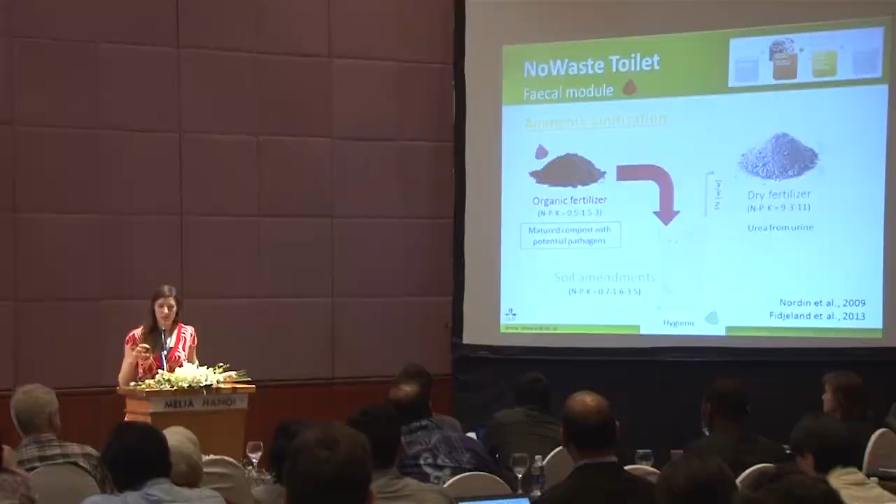So we would like to use ammonia sanitization as a post-treatment to ensure that all pathogens are eliminated. Ammonia sanitization is a technique that my colleague Annika Nordin has been explaining in the past, yesterday. By mixing in 5% weight for weight of our dry fertilizer, the remaining pathogens and enzymes still in the soil in the vermicomposted material hydrolyze the urea into ammonia, and then we're able to sanitize this to get a hygienic output.

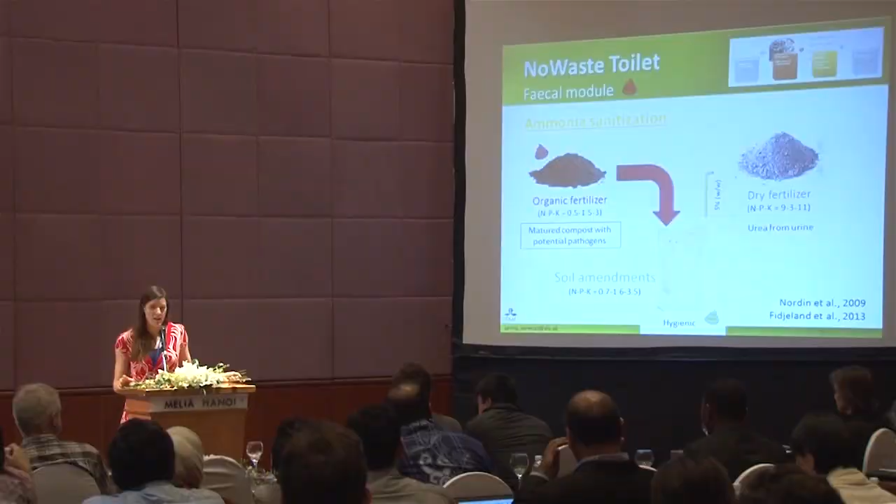Conceptually, this is how the toilet would come together. There's no need for big infrastructure or for deep holes. It can be a standalone unit itself or be implemented in existing households.

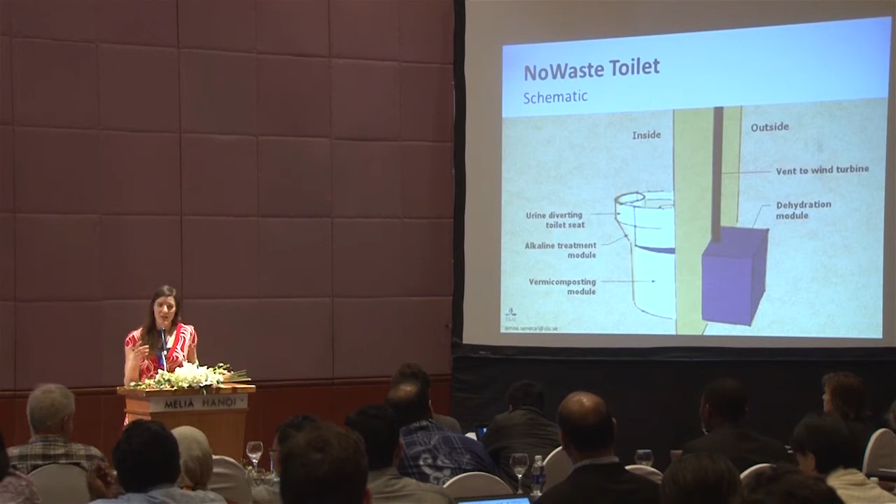The idea is that the urine diverting seat would collect the urine, and the urine would pass directly through the ion exchanger so that there's no time for the hydrolysis to happen, and then pass into the dehydration module. Again, the feces will fall down directly into the vermicomposting bin. This unit would be connected to a powerful fan so that we have enough evaporation rate happening, and be connected to the toilet so that there's a negative pressure and the smell is taken out.

For maintenance, the ion exchanger for a family of 5 would need to be regenerated once a week, and this is done with some hydroxide solutions such as sodium hydroxide. The dehydration module would need changing every 2 months, and the vermicomposting would need to be changed once a year. The estimated cost for the materials to maintain this toilet is about $30 per year.

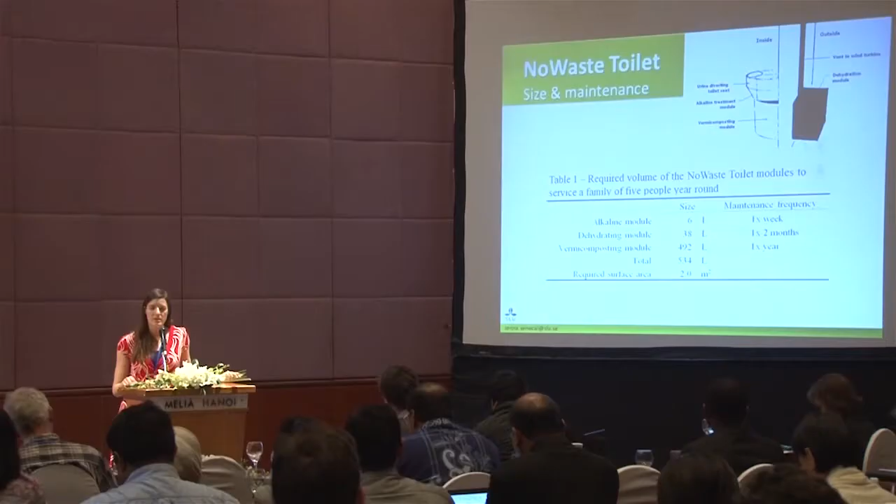Coming back to what this toilet is actually able to achieve, for the urine, we have about 1,800 kilograms coming in annually for a family of 5, and we're able to reduce this to 180 kilograms to produce a dry fertilizer while recuperating 85% of the nitrogen. For the feces, we have approximately 330 kilograms, which we're able to reduce to 35 kilograms, including the dry fertilizer being added to it for the ammonia sanitization.

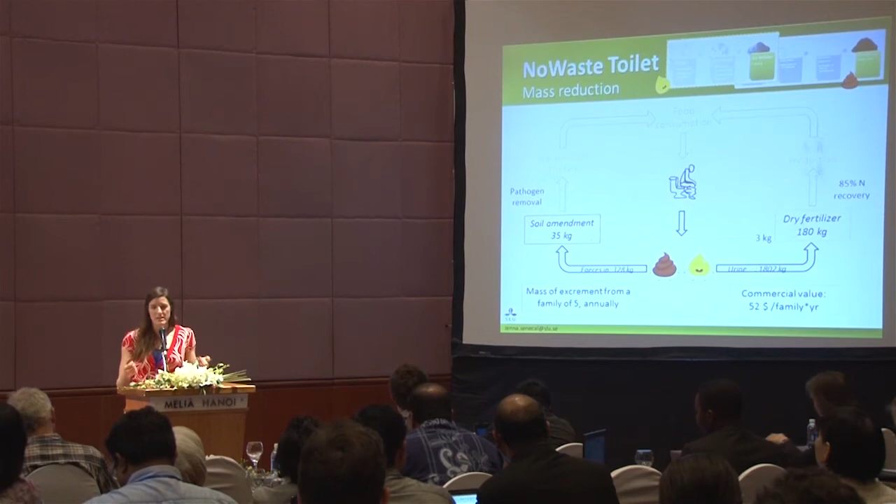So the exciting part is that we don't need a pump truck. We don't need big machinery to dig holes or to get in and empty it. The mass is reduced by 90% into manageable volumes that people can then handle. And a really important aspect is that the pathogens are minimized so that we don't have the spread of disease.

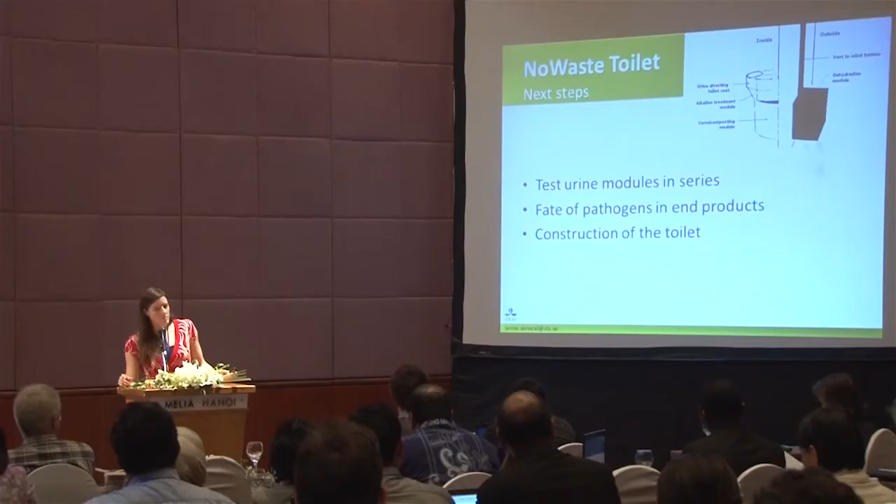Next, for my thesis work, I'll be testing the alkaline and dehydration module in series, and also be looking at the fate of pathogens in the end product. And this summer we will be installing 2 of these units in Sweden as a trial period. As we're still in the development phase of this, I'm very much looking forward to hearing your comments and thoughts, and thank you very much.

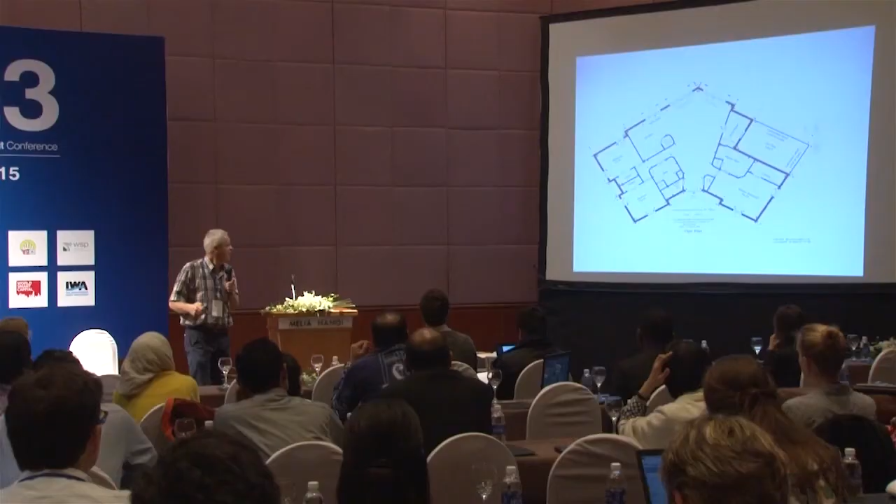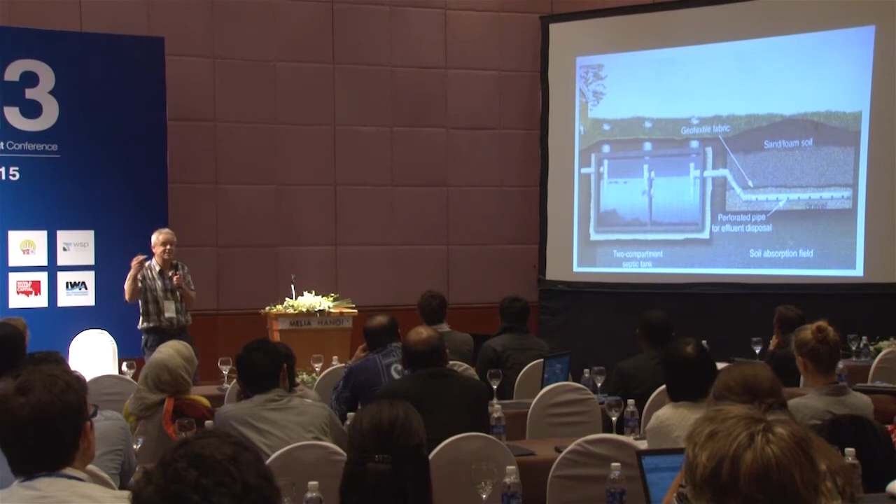Septic tanks - once again, something the engineers have. We've had quite a lot of discussion on this one. When you look at these behavioural considerations, these two seem to be cross-cultural. They don't seem to vary too much from South America into India and Africa. Solid walls, we need a good roof. Strong floor which doesn't collapse. Door with locks, preferably both sides.

Squatters and sitters, the normal sort of things we go through, washers and wipers - you have to take those into consideration. Well-lit places, so people can see where they're going. Ventilation blocks in the wall. And on the back end, which is probably the bit we're looking at, repeatedly you get this sentence: we want permanence, we want durability, I'm not particularly bothered about its functioning. They don't really care whether it's a tiger worm eating the waste, or a black soldier fly, or anaerobic digestion. What they really want is for it to last a long time and not cost them any money.

And then we go to the reflective level of design. This is the slower design. This is what makes us human - our ability to reflect on our experiences and then apply those experiences to other situations in life.

And this is where the self-image comes in. This is where the social norms come in. It wouldn't be right if I open defecated and everybody else was using the toilet. And products like the mobile phone and the car - these are actually where we express and show our self-image to the outside world.

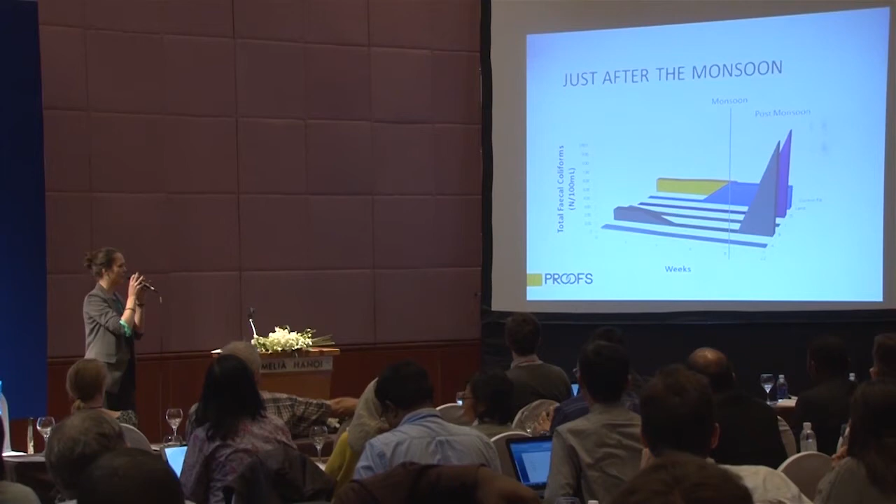This is just a summarization of that. And then we had the monsoon. Through the monsoon, it was working really well. We could get there despite flooding. We sent our guys out to take the samples. And then after the monsoon ended, we went back and sampled again.

And this is where things get a little more complicated. We saw a massive spike in installations B and D. Now, this is probably very bad from a technical perspective, but I couldn't plot uncountable on the y-axis, so I just made it 1,000. We can talk about my methodology, my process, at a later time if you want.

So B and D had this massive spike. I was like, oh my goodness, what's happening? Because the control pit went down to 0 bacteria count. Well, that doesn't work. So I'm like, all right guys, go back out and sample again. And I went with them to make sure they were sampling correctly.

Then we couldn't get any liquid from pits B and D. And we had a spike in A and C. I was like, okay, what is happening? What do we think is going on? At the same time, our sand spiked to uncountable amounts of bacteria, and our control remained at 0.

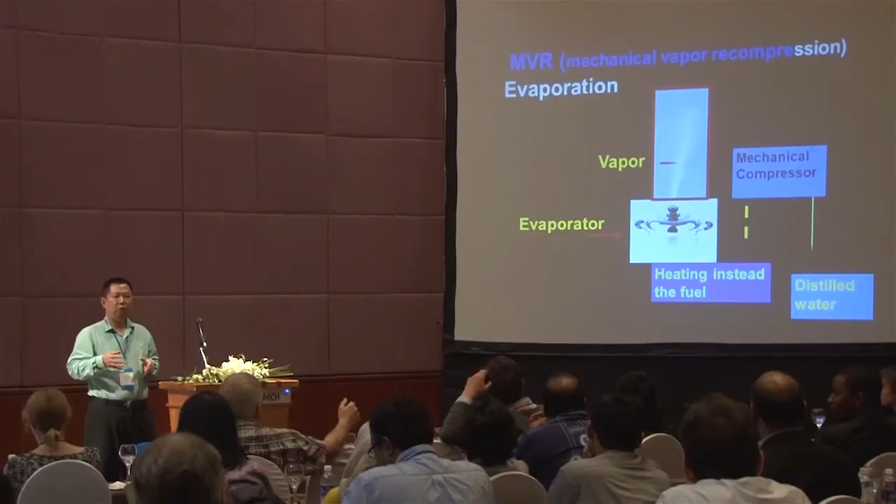Using MVR, the vapor is collected and pushed to the mechanical compressor. The vapor is compressed by the compressor, and distilled water is condensed, and the inner heat of the vapor is released. This inner heat is used as the heating source.

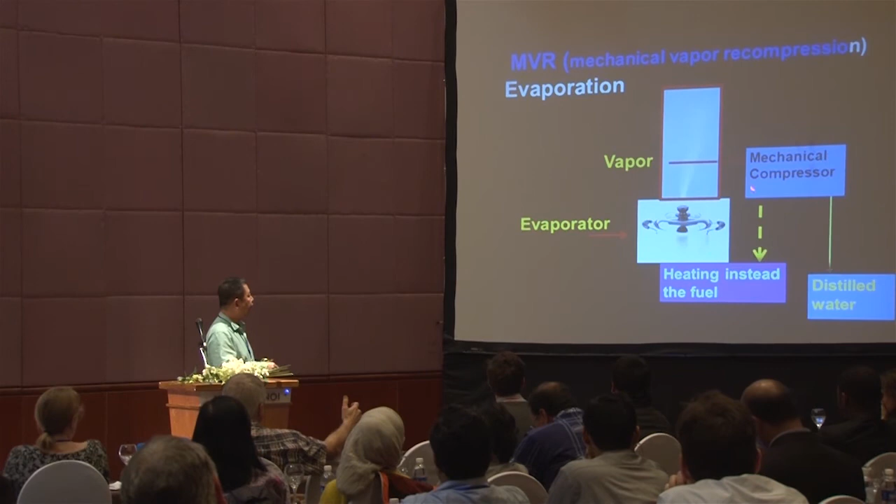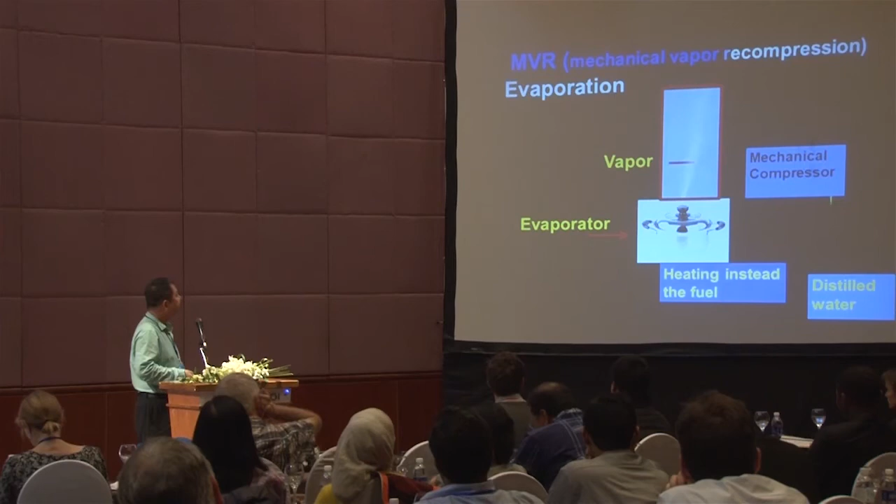The heating source comes from the vapor instead of the previous heating source. They offer the hot energy, so this system saves a lot of energy.

MVR technology can save more than 90% of energy. MVR is not a new technology, it's over 50 years old, but mostly used in heavy industries, for example in distillation plants to get fresh water from the sea.

Our job is to develop a low-cost, family scaled, small-sized MVR human waste process last year. The most hard part here is we cannot find the correct compressor. The typical compressor is industrial and for MVR, but there is no proper compressor in the market.

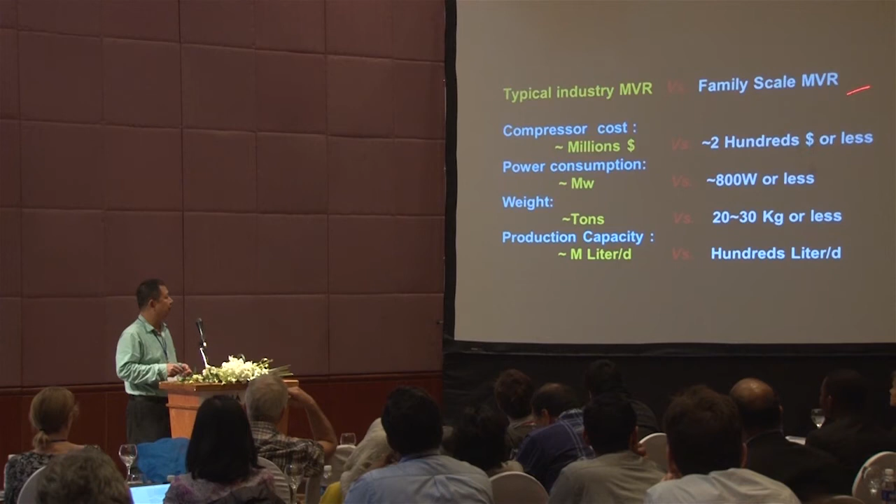So we brought about different small size compressors and we tried to rebuild it. We were very lucky and succeeded, and built a small MVR compressor that's about $200, about 800 watts, and lightweight.

The second challenge is cleaning. You may have this experience: your kettle in the kitchen is really easy to scale if you don't use clean water. So if you use black water or grey water, the system will quickly stop working. Without proper measures, the system cannot work.

The simple idea is a screw and ball system. We put some balls in the boilers, and using this kind of thing makes the system self-clean.

Last year we tried a different way to build MVR processors, this time inside the evaporator, with different shapes and different sizes.

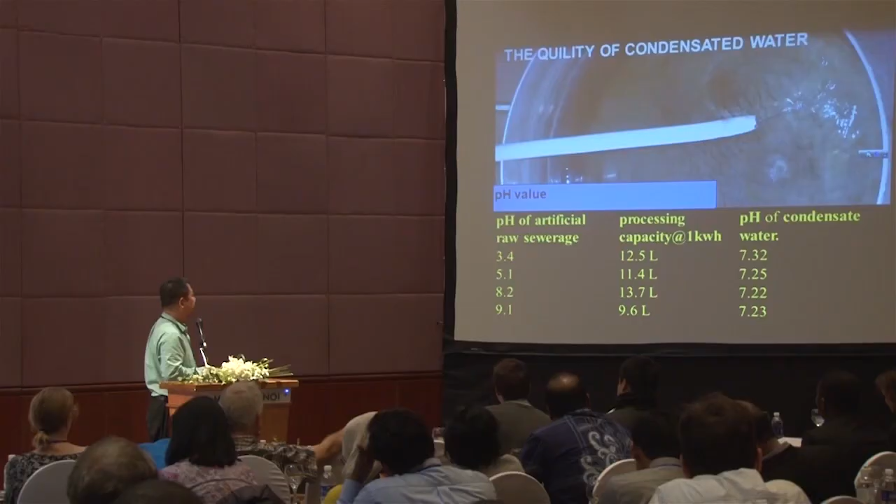Distilled water, remember, you can run it over time. So, distilled water. The quality of the condensed water is quite good, including pH, and the output of dry sludge.

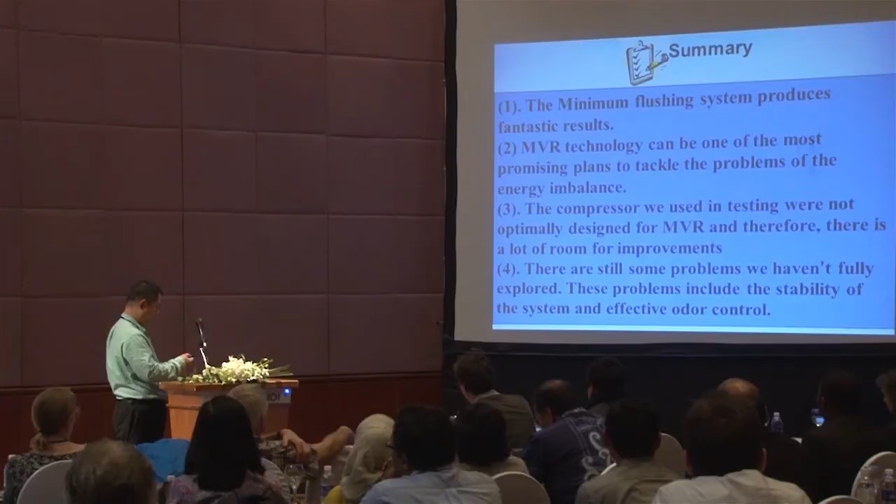The compressor used in the MVR we built still has a lot of room for improvement, so in the future this compressor can be reduced smaller than this. There are still some problems we're working on, including how to control the odors and how to make the system stable, etc. Okay, that's all.

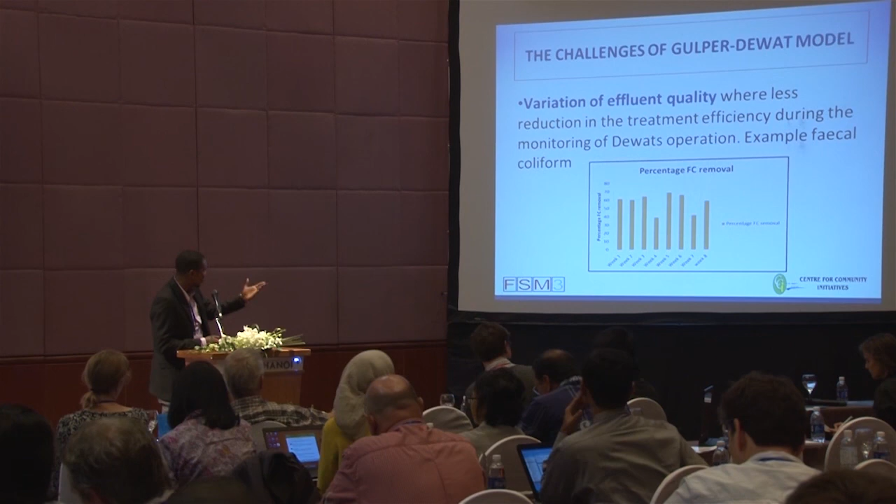The challenge of this Gulper-DEWATS model has been the variation in effluent. This is an example of the percentage removal of pollutant that was started. As you see, it varies, and sometimes it drops to 8%. So there should be some improvement.

So, studies have been undertaken on how to improve the Gulper, working with CCI and other universities on the local context. They are looking into moving from manual to modernizing, and to improve the quality of the fecal sludge. They are now constructing standard features to make sure the quality of effluent is improved.

We need to increase the number of business entrepreneurs interested in this, so we are promoting and mobilizing more people to get interested. Achieving sustainable fecal sludge management is still an improvement that is possible. We need to involve more community, and with more success stories, we need to involve more municipalities and activities.